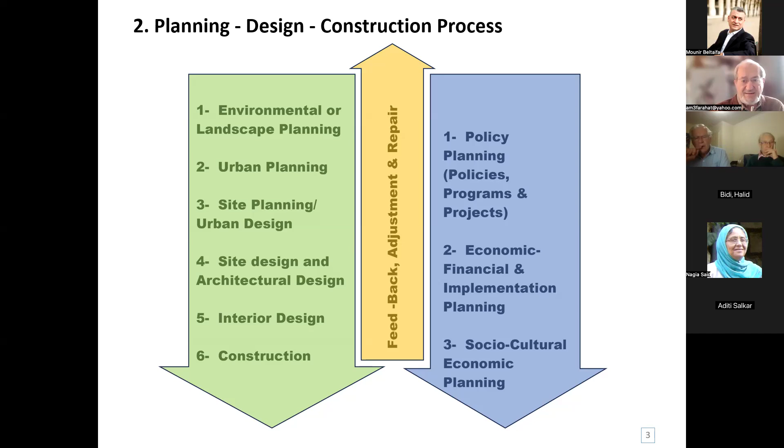I want to emphasize that on the physical aspects, the first step is extremely important: environmental or landscape planning. Usually it doesn't get its fair share in developing countries in general, and even worldwide. On the right hand, the last step is socio-cultural economic planning. Also, the socio-cultural aspects don't get their fair share many times.

Now we will talk about the Gaza Strip as a whole, analysis and planning. The basic strategy for expansion is westward landfill using building rubble.

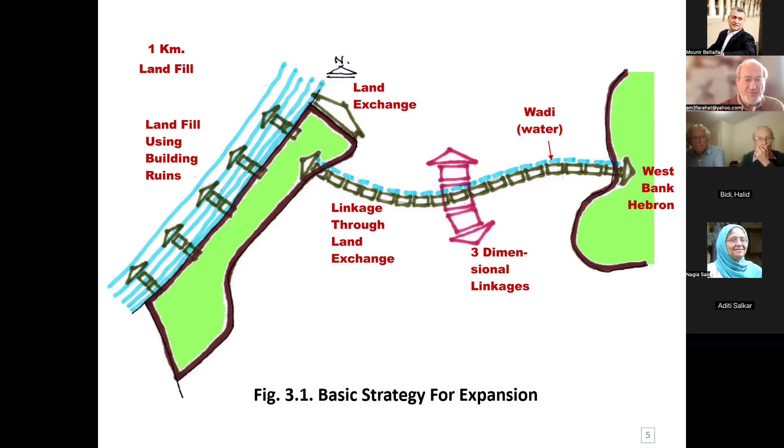There is some chance for land exchange, expansion northward, according to the peace settlement that, God willing, will happen between the Palestinians and the Israelis and the existing Israeli settlements. So some land change may happen, some possibility of land exchange northward and in relation to the connection with the West Bank.

Talking about environmental planning, the most important point is the basic green open space system. Here we are talking about productive green areas, agriculture, all kinds. We must conserve the wadis that already exist. What is shown here are 3 wadis. In addition, we have the main agricultural area on the north and on the east. We also propose a green spine in the middle of every urban unit.

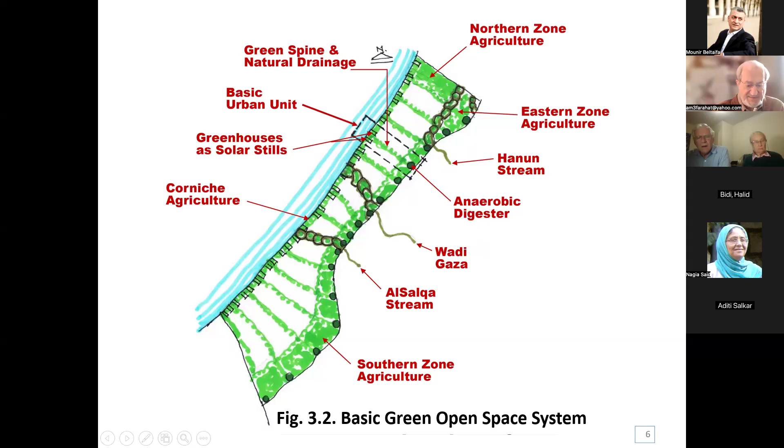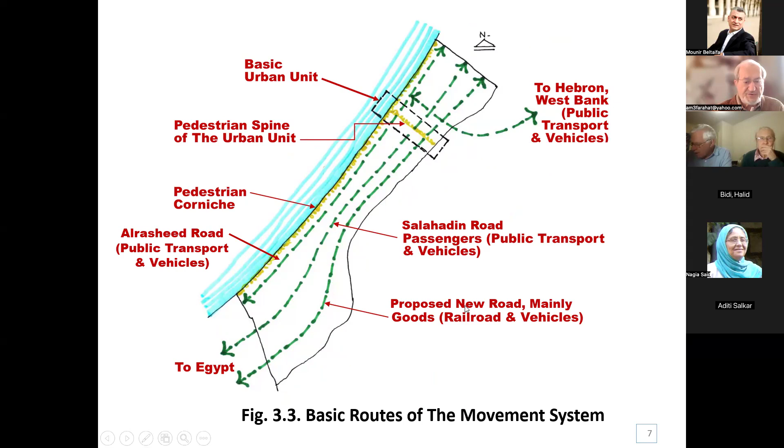This is the basic urban unit, shown with dashed lines. I hope you can see the pointer. It's every 1 kilometer. Gaza coast is 41 kilometers. So a green spine inside each, in the middle of each basic urban unit. For the basic routes of movement, we already have 2 north-south roads. We propose a third one on the east with railroad, and we propose 2 of them to extend to Egypt, in addition to the connection to the West Bank.

Now we come to the rubble. There are many challenges, and I'm sure you are all aware of the tragic situation, the very tragic situation in Gaza. One of the most important challenges, perhaps the most important, is the rubble.

This is in terms of challenges for reconstruction. This is an old estimate that the rubble in Gaza can make 10 great pyramids of Giza. Today, it exceeds 15 great pyramids of Giza and is estimated to be 65 million tons.

So one of the first steps we did, Ahmadullah and I, was to put a grid or strips of 1 kilometer wide on Gaza Strip as a whole and search for the places with the least possible rubble. Going from north to south, there are 2 potential urban units on the north, but this should be devoted almost completely to agriculture. Then there are 2 other potential urban units immediately south of Gaza City. Then there are 5 potential urban units south of Deir al-Balah, near the middle of the Gaza Strip.

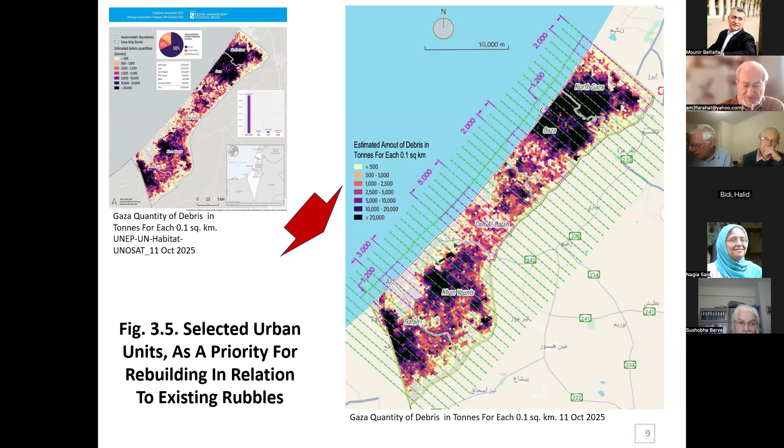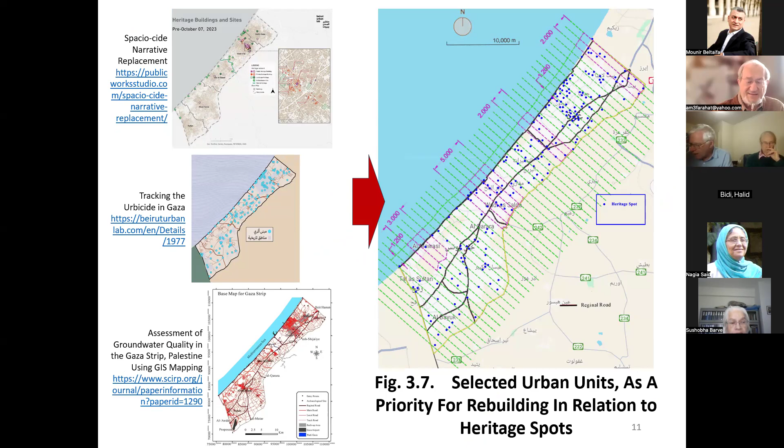Then we have the historic spots, heritage spots. These are very important, and many of us would be astonished to know that there are tens of historic sites in Gaza that must be restored just as they were before the war. Many of them are already destroyed.

There are certain depressions related to wadis. Wadis in general go from east to west with the slope, which goes from east to west. But some wadis or tributaries can go from south to north, and these are subject to flooding.

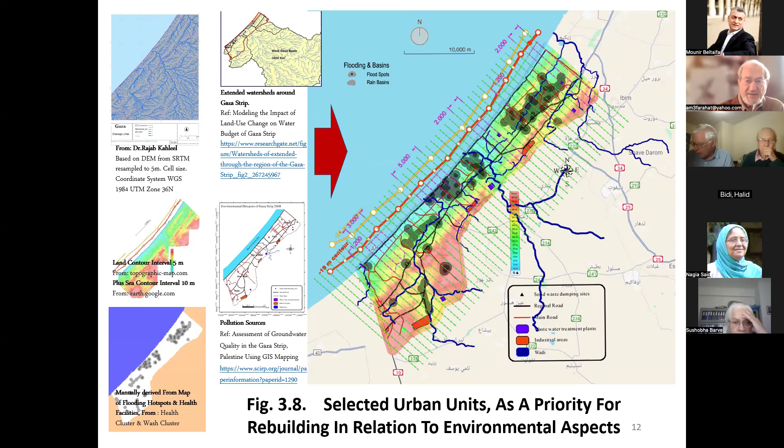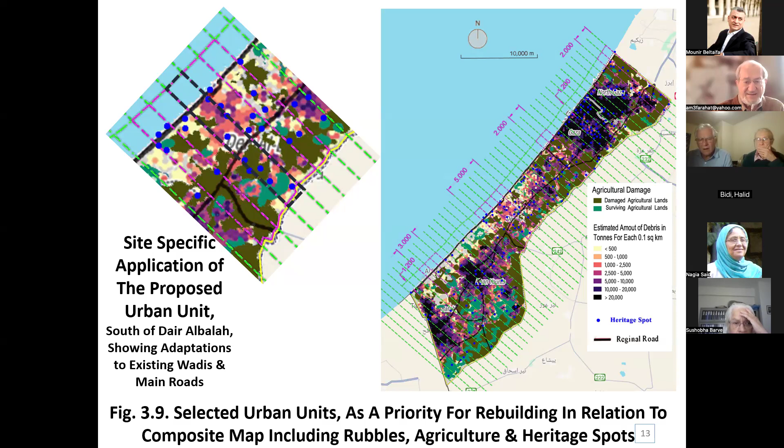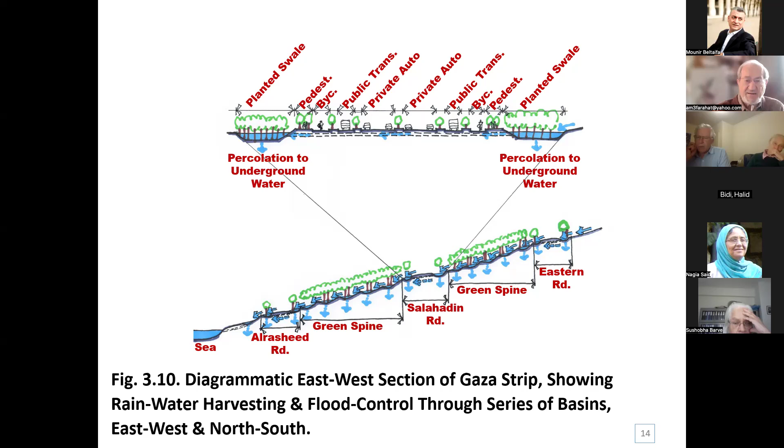Now, if we take a close-up of the middle road, Salah ad-Din Road, we have the section at the top. In addition to what must happen in future in relation to any contemporary main road, in addition to automobiles, there must be public transportation, public transit, lanes for bicycles, generous sidewalks for pedestrians. We propose also considerably wide planted swales on the two sides of the road, again for rainwater harvesting, and in this way you can almost prevent flooding from happening.

Now we shift the scale to the generic urban unit. There are a lot of calculations, quantitative information, but basically the population of the urban unit is approximately 150,000 population or less. The landfill area can add another 25,000 population. So with 7 urban units ready to start reconstruction, we can accommodate more than 1 million population in this area, around this area.

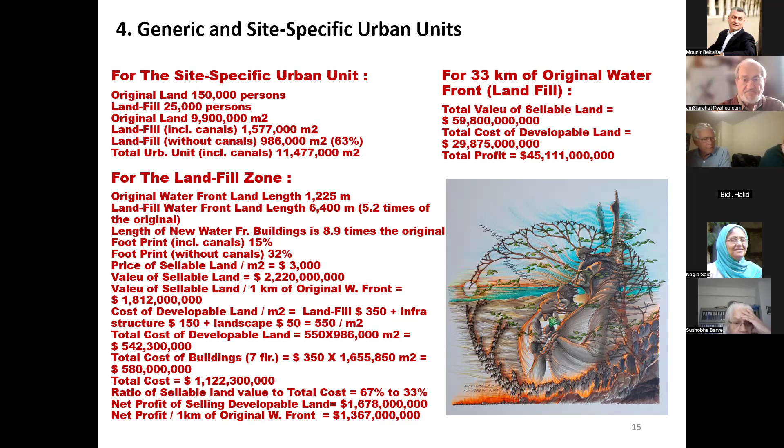On the west we have the landfill area in which we propose everything is 1 kilometer wide. The landfill area into the sea is within 1.2 kilometers. This would mean not exceeding a depth in the sea of 6 to 7 meters. And only 60% of this area would be landfill, because we recommend having canals and lakes. In this way we can multiply the waterfront by 5 times, land waterfront.

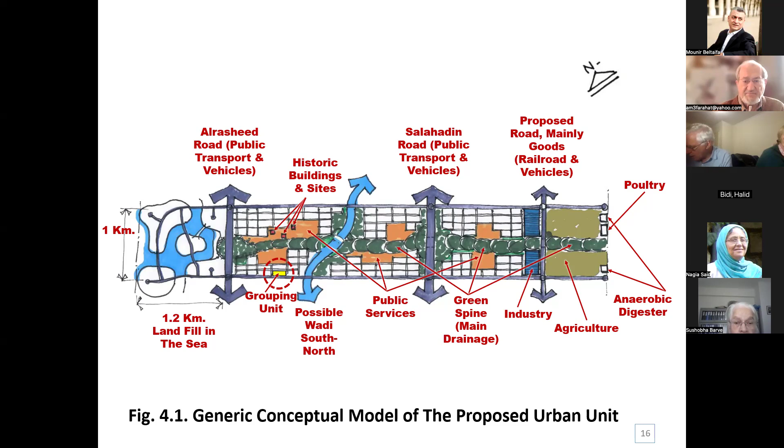And this greenhouse would act also as a solar still, converting saline water vapor into potable water. So it acts to produce vegetables, fruits, fish, edible fish, and in addition to that it also produces potable water, converting saline water into potable water.

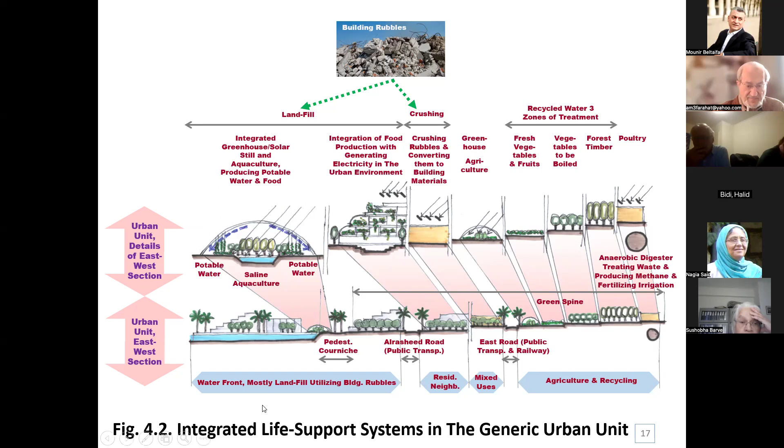The most important element in it is the local mosque. And the local mosque, according to Gazans, was not only for worship. It's a cultural center, a social center, an educational center as well.

Activities related to formal schools and activities related to short courses, languages, computer skills, etc., for the youngsters and the elders as well. It also has the primary school, which we will talk about later, and some shopping activities and cultural services.

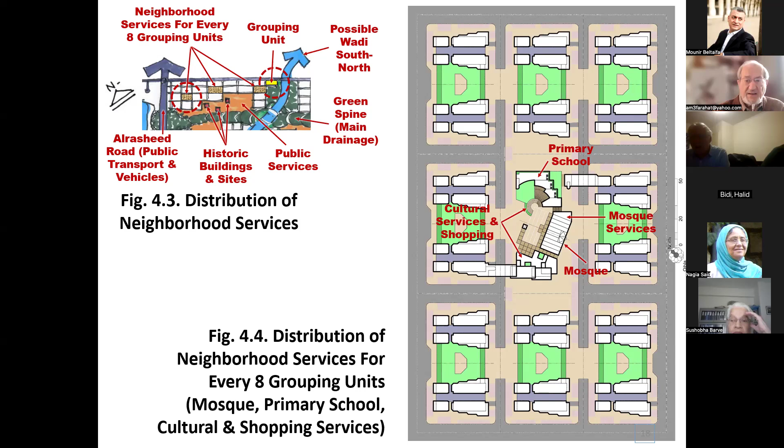It can be reached from any grouping unit within 5 minutes and without crossing streets.

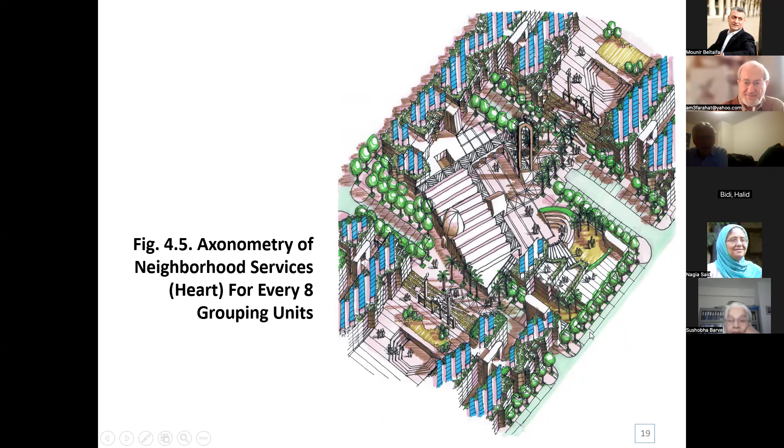Now we come to the landfill area. The landfill area, in relation to every urban unit, we said is 1 kilometer wide on the original coastline and 1.2 kilometers into the sea. And we have two basic generic models.

The most important result is that we can multiply the waterfront land, the length of the waterfront land, 5 times. This is because the waterfront line would be irregular, undulating, and because of the islands and canals.

The buildings are also not just one straight line. They are undulating, irregular in shape. So this can have another doubling of the waterfront land line.

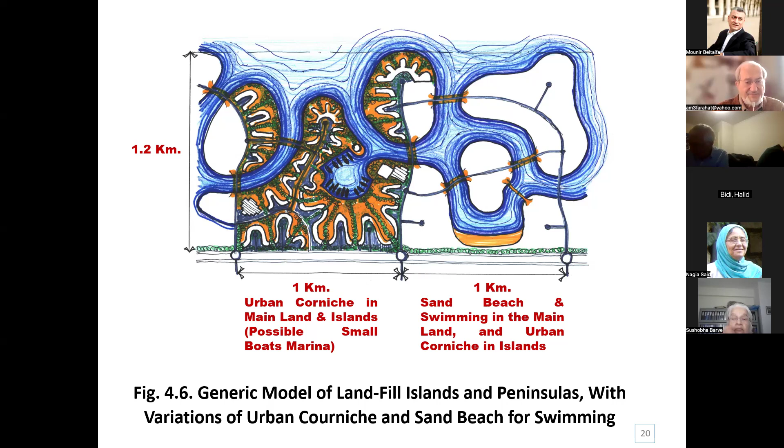So in conclusion, we can increase the number of buildings from the original situation before the war by 9 times. So if you originally had something like 100 buildings in 1 kilometer, they can become 900 buildings immediately on the new waterfront.

These are close-up axonometric views and sections.

What we recommend as the nature and character of the buildings is to have mid-rise buildings, not high-rise buildings, averaging 7 floors, but not constant 7 floors. We recommend from 3 stories to 11 stories.

Why that? In order to have terraced buildings, and in these terraces you will have green landscape, so you end up with a 3-dimensional landscape.

This can result in a beautiful environment, perhaps more beautiful than anything in the Middle East, perhaps in the world.

There must be voids in the large, relatively large architectural masses, for ventilation, which is shown in the section to the bottom left.

A very important element is the urban corniche, which is shown in the bottom left section, and shown here in the axonometry as well.

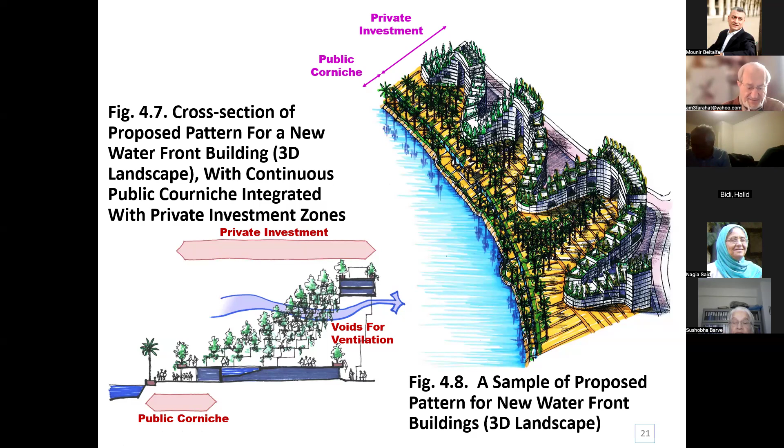In the section, it indicates that even with private investment that requires a gated community, for example, we must still have a continuous public corniche, so that there is always a connection, a bondage between the new landfill areas and the mainland. These are samples of what could happen.

These samples are from Al-Buhayrat city north of Jeddah, which I designed. And the importance of it is shown in the main perspective at the bottom.

It shows most buildings are mid-rise buildings, and in very few strategic points you can have landmark buildings, 20 to 30 floors. And even in these large buildings, you should have considerable voids for ventilation.

The other two perspectives show the possibility of what we consider, what we hope to have, of a three-dimensional landscape.

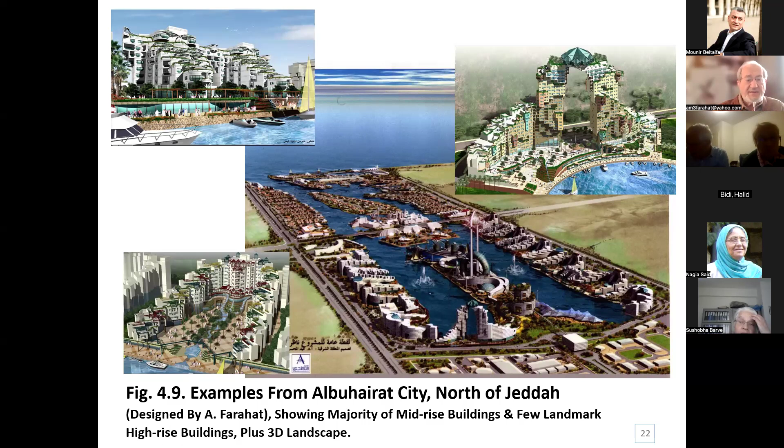Now, this is the site-specific application of the proposed urban unit. We said 1 kilometer wide, but in reality, in this chosen urban unit, which was, I remind you, the middle unit of the 5 potential urban units in the first few maps, instead of 1 kilometer it becomes 1.2 kilometers.

And instead of straight lines east-west, they are undulating, curved, according to what you see.

This is because of the existing roads, and also in relation to certain wadis or tributaries, and also in relation to historic sites, which are these black squares that must be integrated into the new fabric. So this is what we consider to be the site-specific application of the proposed urban unit that can start immediately.

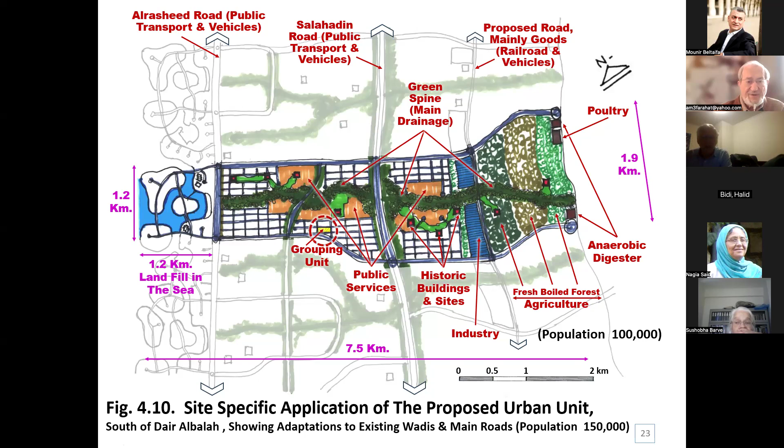I will not repeat what I said before. The main elements are the green spine running from east to west, agriculture, with the main agricultural areas to the east, with the 3 zones of agriculture that I talked about, and the industrial strip, the central services here, and this grid made of the residential grouping units that I will talk about later.

And now we start talking about the generic grouping unit of 250 residents average.

One of the common mistakes is to shift the design effort and scale from the design of a single building to the planning of the whole layout of the residential areas. But between the two, there is a very important scale which is called the grouping unit, a group of residential buildings in relation to a space in which they can gather.

A very important element we propose is the vertical integration of activities. We all know the possibility of commercial activities under residential activities, but here in the Gazan situation, we propose another public activity floor on the first floor for administrative activities, offices, and educational activities.

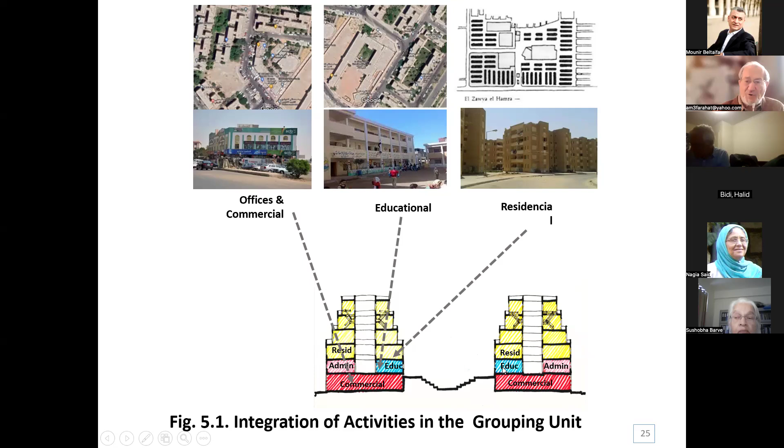So this is the detailed section. The blue color relates to the educational spaces, half of the primary school, the first 3 years, in relation to an open air theater, with proper areas just like a normal school. In fact, even more generous open space than what they can have in average formal primary schools. The parking garage is very important, also used as shelter.

And in the middle, there are wind-driven electric generators, because of the funnel effect in relation to these buildings. We'll talk about it later. And photovoltaic solar collectors at the top, in addition to food production in terraces of every residential unit.

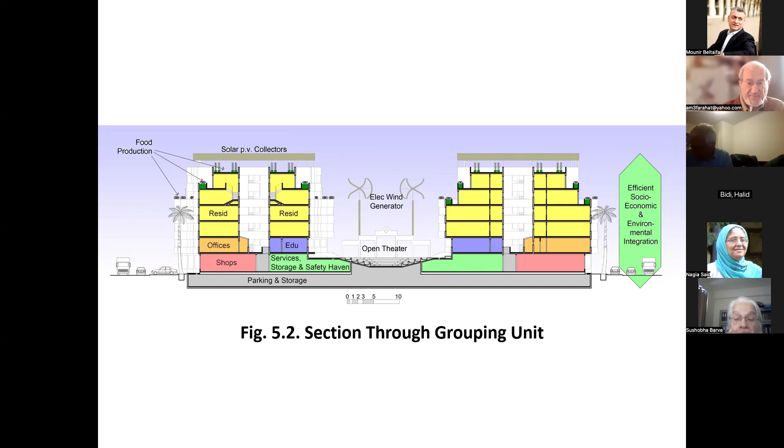This is an axonometric showing the grouping unit. You can see the photovoltaic solar collectors, the food production on terraces, and possibly small greenhouses, the open space, the open air amphitheater, the symbolic gates that can be real gates if necessary, and the wind-driven electric generators making use of the funnel effect between buildings.

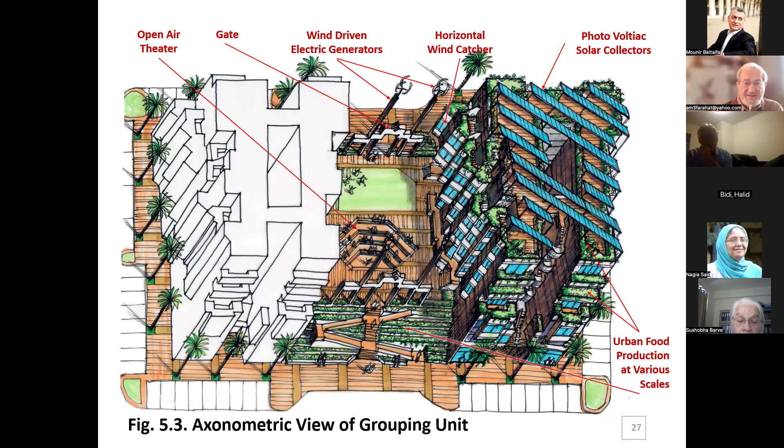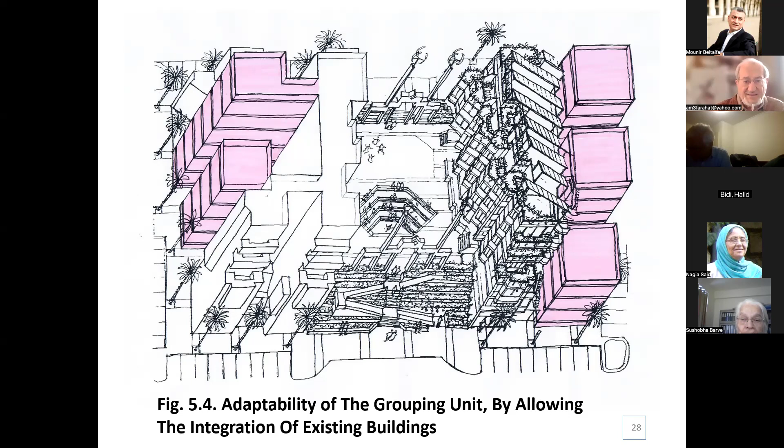Now this grouping unit is not rigid. It is flexible, adaptable, and can incorporate and integrate with existing buildings. The estimate of destruction of buildings in Gaza ranges between 80% to 90%. According to engineers, any building which is 40% destroyed is considered 100% destroyed, it cannot be restored safely. So the ratio of destroyed buildings is nearer to 90%, perhaps more, but with the possibility of existing buildings, they can be incorporated into the grouping unit.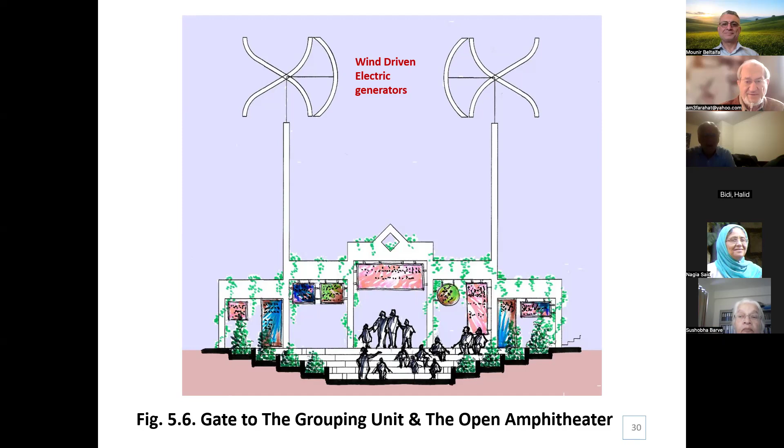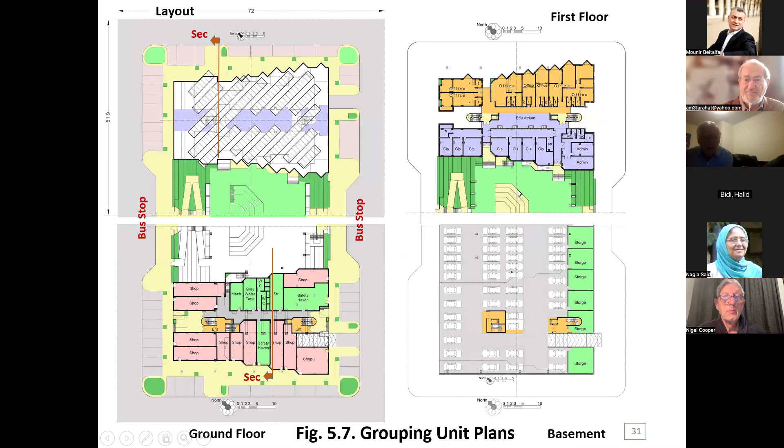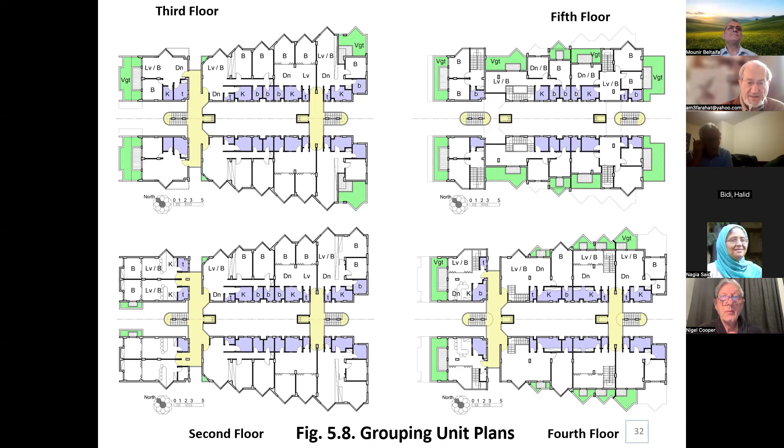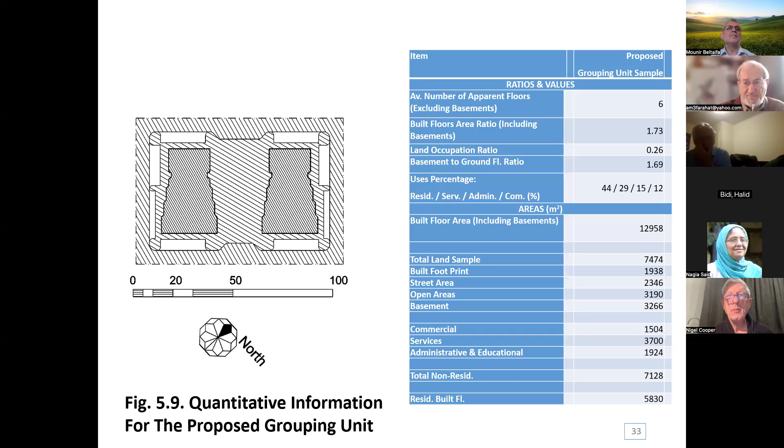Then we come to the quantitative information. I must say Ahmadullah made all of this, and did a great job with a lot of effort. The quantitative information relates to our proposed grouping unit in relation to urban samples of the existing situation before the war. I think it is better to look at the conclusion: we took an area made of our proposed urban units, top left corner, and then we had 3 samples of urban situation in Gaza before the war.

To the right, we have the squatter settlements, and they are not a small area. They are huge areas of Gaza before the war. Then we have the regular or formal places in the middle, following municipality rules. And at the left, the encroachment on agricultural areas, as it could happen in future if it continues.

The situation before the war had fewer buildings than what is shown here, but we had to complete the picture of what could happen if it continues.

So the general conclusion is that the previous situation has more floor area than our proposed grouping units, around 10 to 15% more. But the ratio of open spaces in our proposal is far more logical, more rational, more needed than the open spaces in the 3 urban samples. In fact, the lack of open spaces in those samples is a clear indication of the oppression practiced on Gazans before the war for decades.

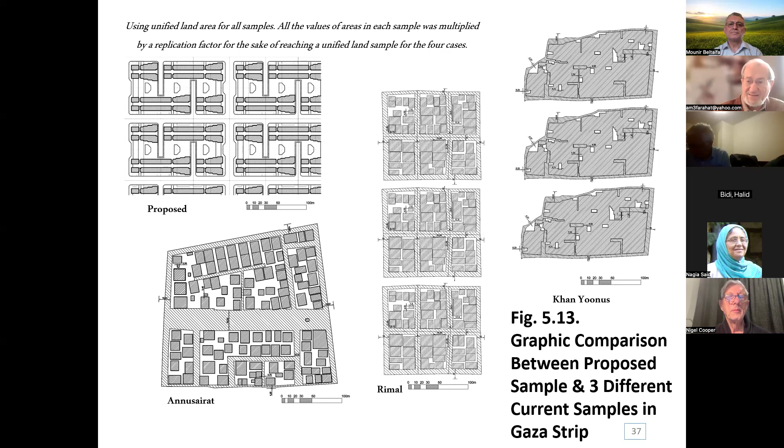In conclusion, the cost of the residential unit can be reduced by 50% with our proposal. Shopping, office spaces, half of the primary school, if you add this all together, you can reach a cost reduction of 50% less for the residential unit. These are the calculations.

Now we shift to the present situation, a very tragic situation of tents. I think you've all seen the flooding, the storms, and the tents are very fragile. So what can we do about that? In our opinion, we must link the temporary situation to the future situation.

We recommend avoiding prefabrication as much as possible, maybe only in certain emergency situations related to clinics or health facilities, but even then not the full hospital. Why do we recommend avoiding prefabricated systems, although they may seem like the logical answer to an emergency situation where you want to construct things urgently?

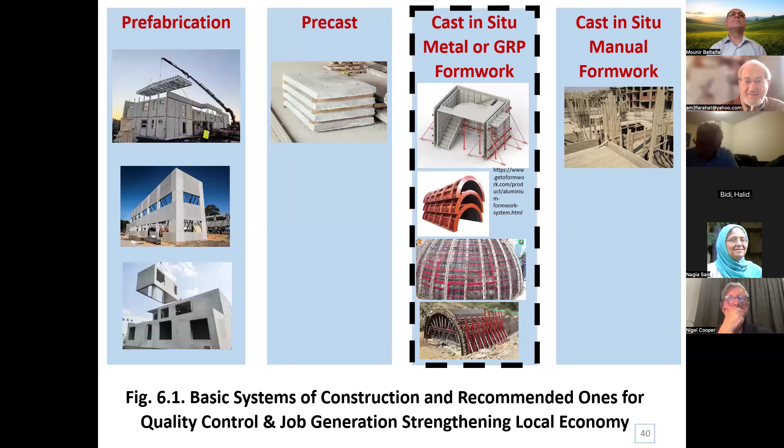This involves vaults and groined vaults. It's not a semicircular vault, not even a third of a circle, just a gentle curvature. This can reduce steel reinforcement a lot while being more economically efficient.

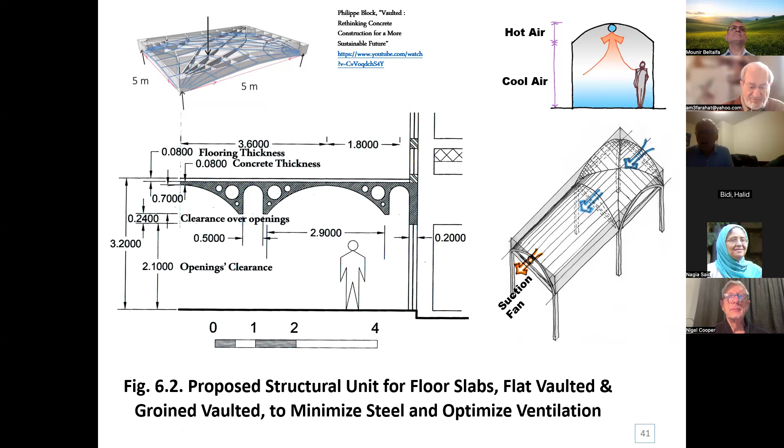With that in mind, the scaffolds or modular formwork molds of the buildings to be constructed can replace the roof of the tents, and can be assembled manually, in addition to styrofoam and canvas for openings. For the walls, we can use interlocking systems.

No, I'm just about to finish. It's about an hour, isn't it? Okay, I'm about finished.

Interlocking unbaked earth blocks made with a hand press. These can be reassembled without mortar for future buildings. In other words, we are linking the temporary situation to the permanent buildings to be constructed.

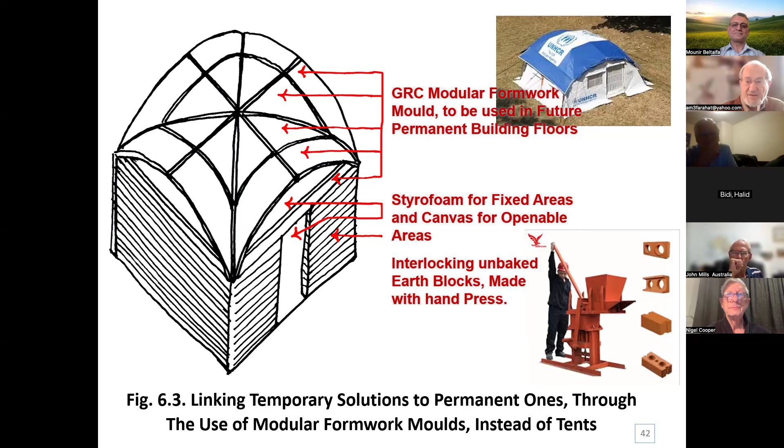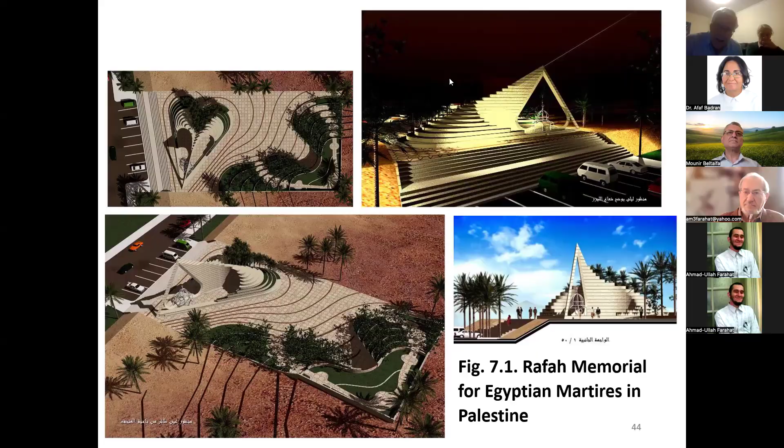There's a key principle behind that, which is that the Gazan people should be empowered and responsible for themselves. All this planning that went on last year for the Arab plan for Gaza conceived of Palestinian technocratic ministries. The people who have assumed that role since the 13th of November, the 16 so-called potential ministers responsible for each sector of practical life, they're not politicians, they are technocrats, and they cannot even get into Gaza at present. They are blocked in Egypt, and they are meant to be on the ground in Gaza.

That need was expressed as a priority last week during our seminar with a key colleague from within Israel, who said that was one of the points we should fight for now - allowing the so-called Palestinian government to get onto the ground in Gaza. At present, they're blocked outside. Britain is financing the communications and infrastructure so that they can get into Gaza and start working on the ground as ministries.